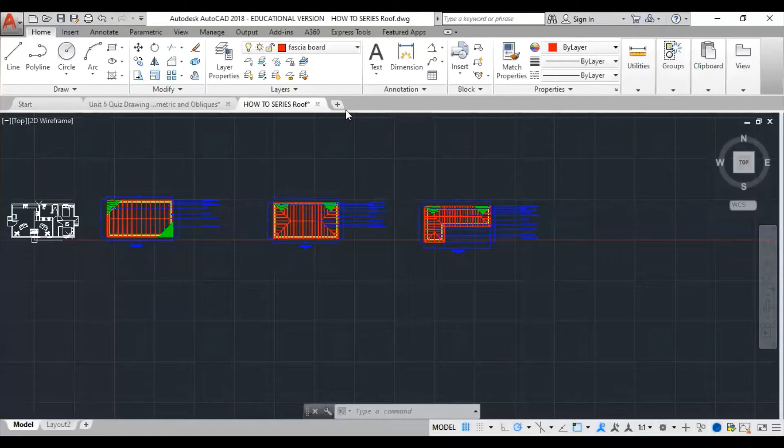Now, in terms of the dimensioning and labeling for the roofs, I will not be going through those in detail because once you do it once, it's basically doing the same thing for all the other four corners. I'm going to only show you how to label one part of the drawing, and you're allowed to do the rest by yourselves. Okay?

So I'm assuming that those of you in 4C have been able to complete a gable roof. I would like a verbal response, please. Were you able to finish the gable roof? Yes, miss. All right then.

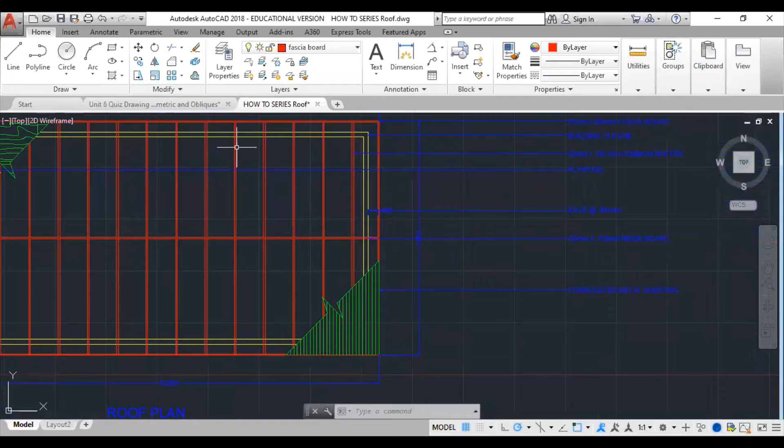Now, what I'll be showing you today is how to create a hip and valley roof. Just as the gable roof, you would need the outline, the building outline of the floor plan which you've drawn before attempting the roof plan.

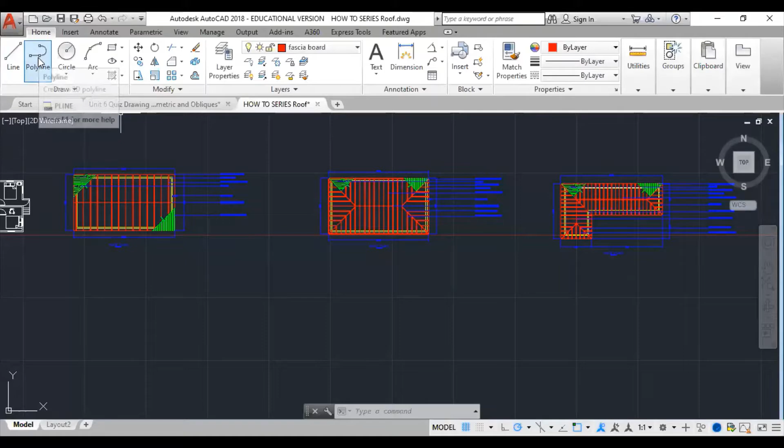So in this case, even though I've already created a hip roof here, what I'm going to do is take the outline of the existing building and create another drawing below it. In order to do so, you can use either a regular line or polyline, but polylines are easier to use to capture the entire outline of the building. So using the default layer, I'm going to select polyline and select the four edges of our building.

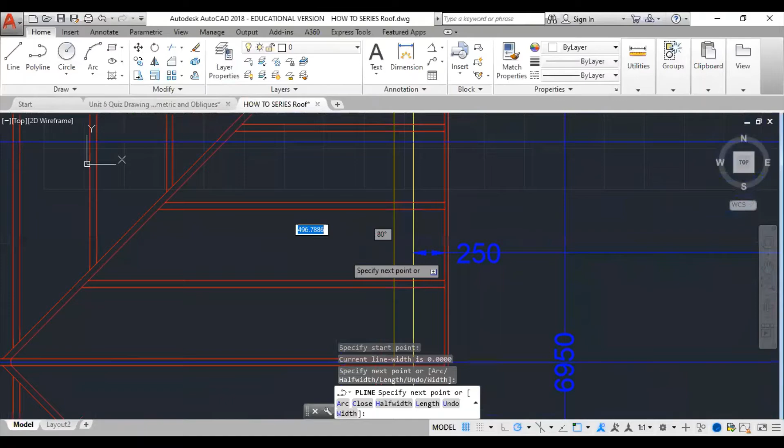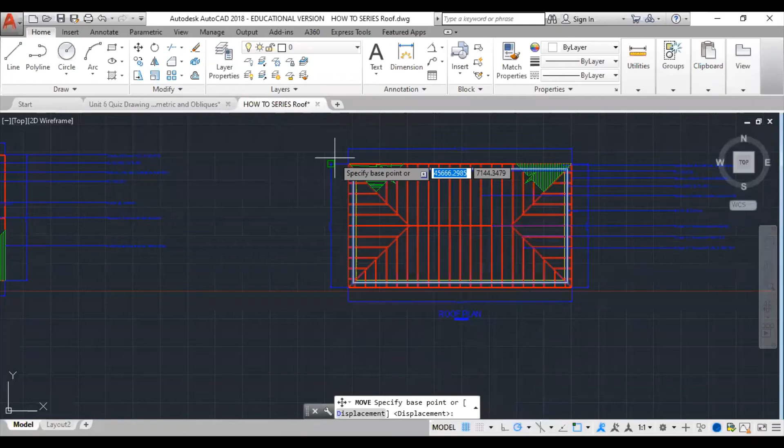All right, now once that is done, I'm going to select the line and then move it towards the bottom of my screen. So this here is my building outline.

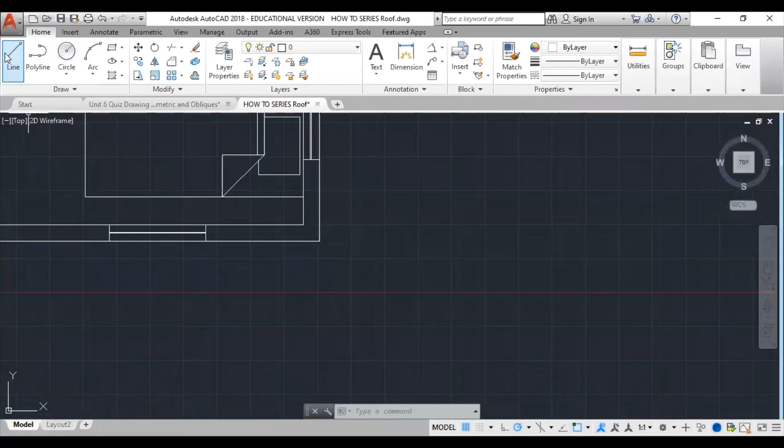Now, the thickness of the wall is determined by the thickness of the wall within your floor plan. If your wall thickness is 150, you offset inwards 150 millimeters; if it's 100 millimeters, you offset inwards 100 millimeters. It all depends on the thickness of your floor plan wall, the external walls of your floor plan. In my case, my walls are 150 millimeters thick, so within the outline that I have here, I'm going to offset 150 inwards. All right.

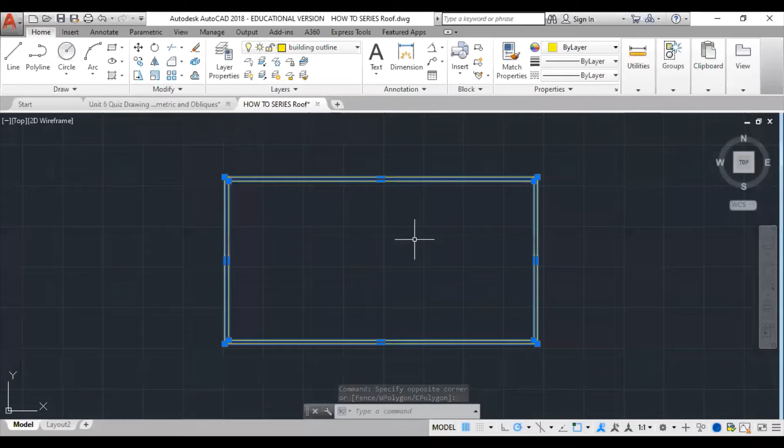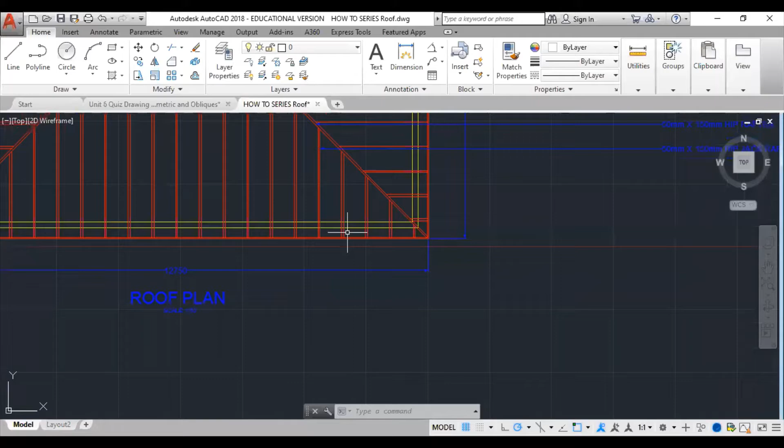Within my layers, we already have the pre-existing layers from the other roof plan that I've done. So what I'm going to do is change my building outline into the color yellow, but it should be yellow hidden lines, all right? Apparently I don't have that, so I'm not going to go through that today. All you need to know is that the building outline for your roof plan should be yellow. Take note of that, please. In terms of what type of line should be there, I'm not going to go through that as yet, but we may be able to tackle it some other time.

From there, we're going to create our eave in order to place our fascia board on our roof. Our eave is supposed to measure from the edge of the building 250 millimeters. So from the edge of the building, we measure 250 before we meet the inner edge of our fascia board. For those of you who may not know, the eave is the distance between the building and the fascia board within your roof.

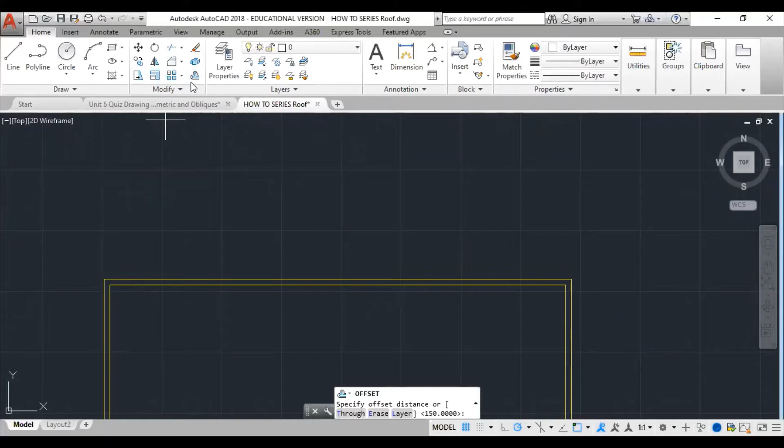So I'm going to offset 250 outwards, not inwards. In this case you may start to be a bit confused about which line is which, and this is where you should at least have these layers pre-existing before you attempt your drawing. So this third line, which I offset at 250 millimeters, will represent the inner edge of my fascia board.

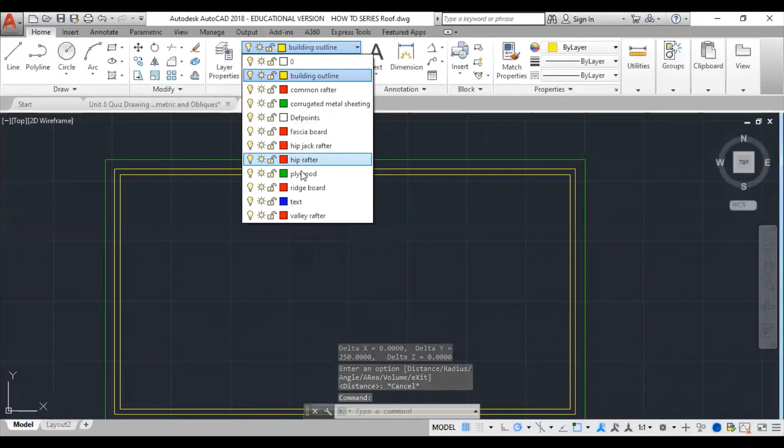So I'm going to select the line, then select the fascia board layer, and automatically it turns red. From there, I'm going to offset 25 millimeters to represent the thickness of my fascia board. And there's no need for me to change a layer because the previous layer before that was already red.

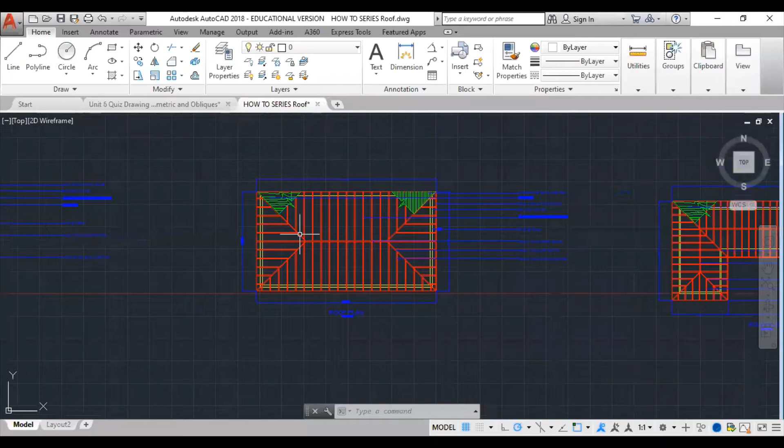So we have our building outline in place, we have our fascia board in place. Now, for those of you who may not know, a hip roof is different from a gable roof because it has four slopes within its edge. A gable roof only has two slopes.

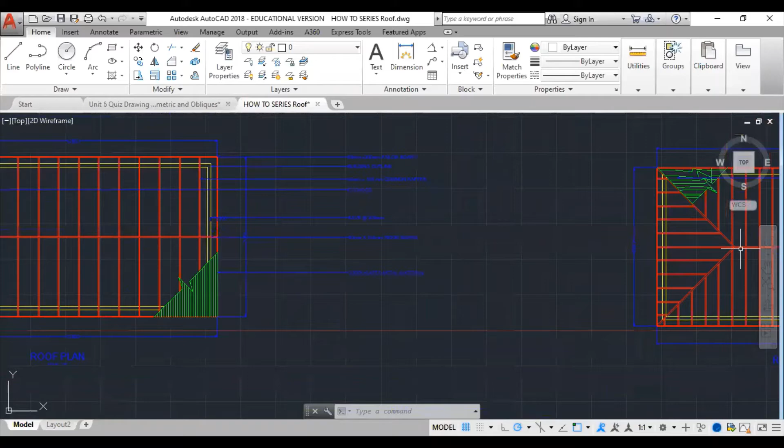So with the hip roof, we need to have rafters which will join at a common point. These rafters are called hip rafters, and then they're connected by a ridge board within the center. The same ridge board that creates stability within a gable roof is the same ridge board that creates stability within a hip roof as well.

All right, so with our drawing being here, I'm going to use the default layer, which is white. I'm going to draw a line at a 45-degree angle to meet within the center of my drawing. Now, to ensure that your line stays at 45, you go at the bottom right-hand corner of your screen.

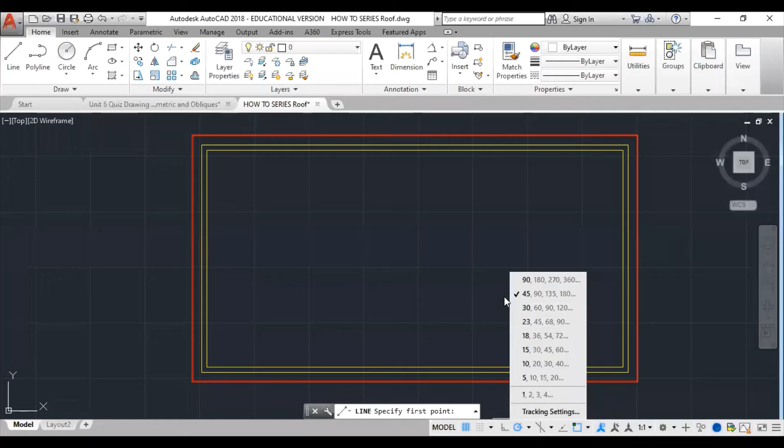You're going to see a circle with an angle within it that looks like a pizza slice. This here is the restrict cursor. You ensure that you change the angle to at least 45, 90, 135. Previously I had it as 30, 60, 90 because I wanted my lines to be at that angle. In this case, you want yours to be at 45, 90, 135. So you select or ensure that there's a tick next to that option.

Another thing is ensure that the grid is always on. And for the snap cursor, ensure that icon is on as well. Ensure that you have at least these parts ticked off. Well, these don't really matter, but in terms of the endpoint and midpoints, ensure that these two are ticked off at least.

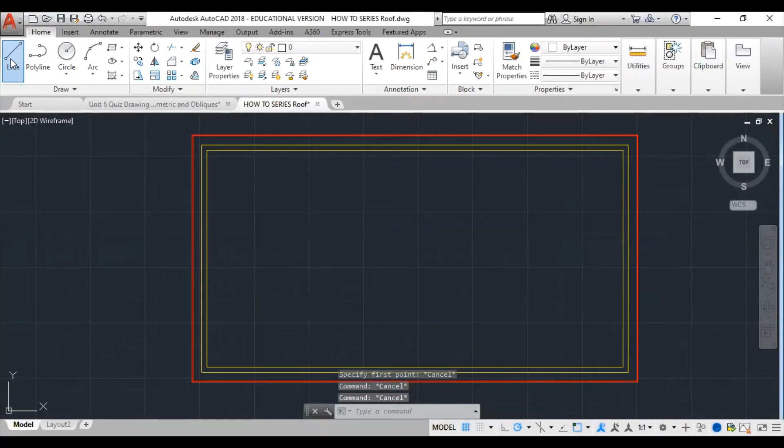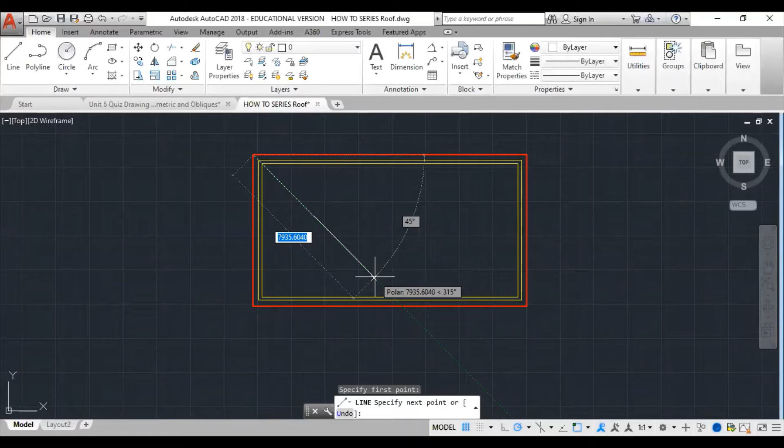So once you've checked that, you're going to start from the inner edge of your fascia board and draw a line inwards at a 45-degree angle. If you can see on my screen, it snaps at 45, or shows you at what angle the lines are at. And automatically you're going to know when it's at 45 when it snaps, and you see a green extension projecting outwards from the line you just drew. You do the same thing on the other side.

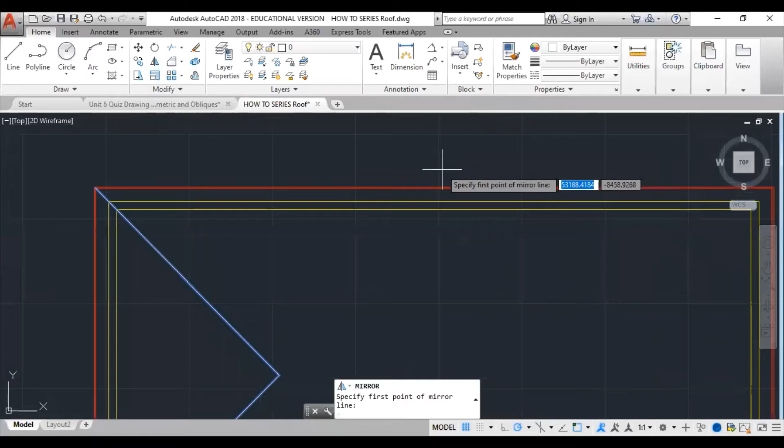And then you trim the excess line within the center. Now you can do the same thing up on the other side, or like what I'm about to do, I'm going to select these two lines and mirror it so that it's represented on the other side. Now to ensure that's centered, make sure that there's an even line or a straight line that shows the exact center point within the image, and you just mirror it.

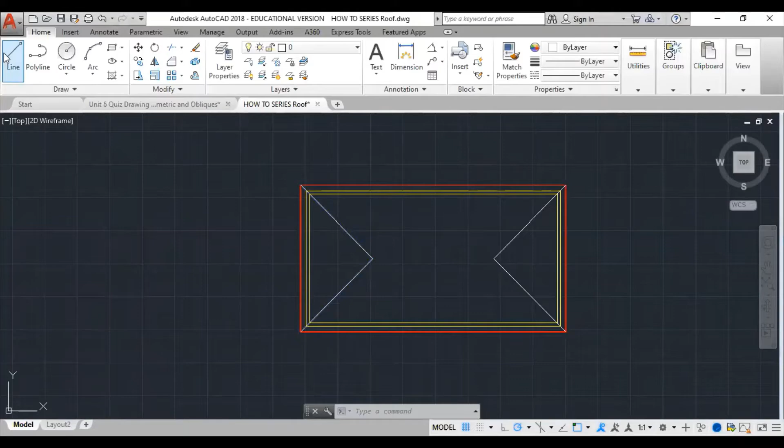It's going to ask you to erase the source object. You're going to say no because you want the source object. And there we go with the outline for our hip roof. Once that is done, you're going to draw a line within the center, connecting both hip rafters, and that there is your ridge board.

Is there anyone who does not understand so far? All right then. So...

The thickness of your rafters, whether it be common hip rafters or ridge boards, they vary in thickness depending on the size of your structure and the specifications. All you need to know right now is that the most common thickness of a rafter is 50 millimeters or 2 inches. That's the most common and the most used size of rafter in terms of its thickness.

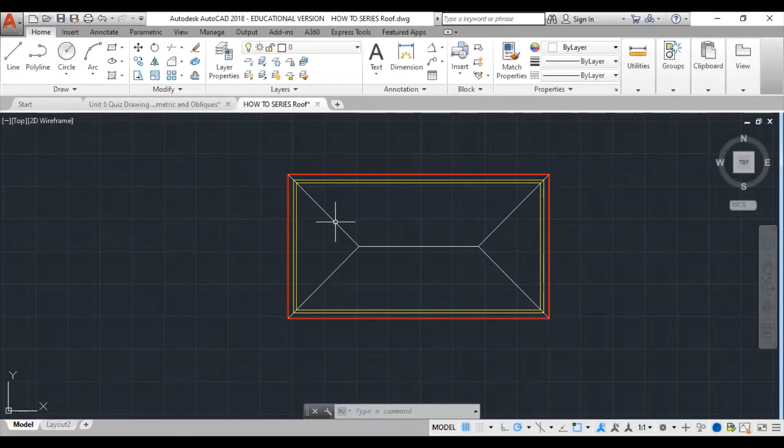So from the plan view, all of your rafters, whether it be ridge, hip jack rafter, hip rafter, or common rafter, they all measure 50 millimeters, as you can see here.

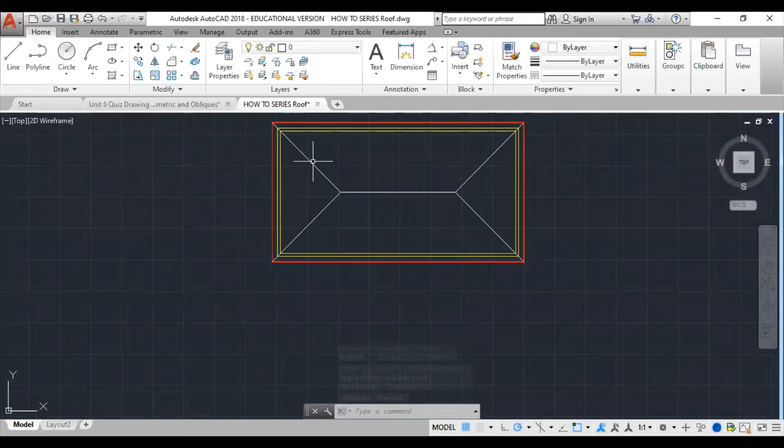So seeing that these white lines here represent where the rafters are going to be placed, this here is not the thickness of the rafter. You must include the thickness. So seeing that these lines represent the center points, it means that we have to find the thickness by offsetting the distance on both sides.

So if that rafter is 50 millimeters thick, it means that you need to offset from the center line 25 millimeters on both sides. 25 plus 25 equals 50. So I'm going to offset 25, do the same thing on the other side, and move to the other option.

Now, if you want, what you can do is just do the hip rafters on the thickness on this side. And once you've trimmed everything, you can just mirror it instead of having to do it 4 times.

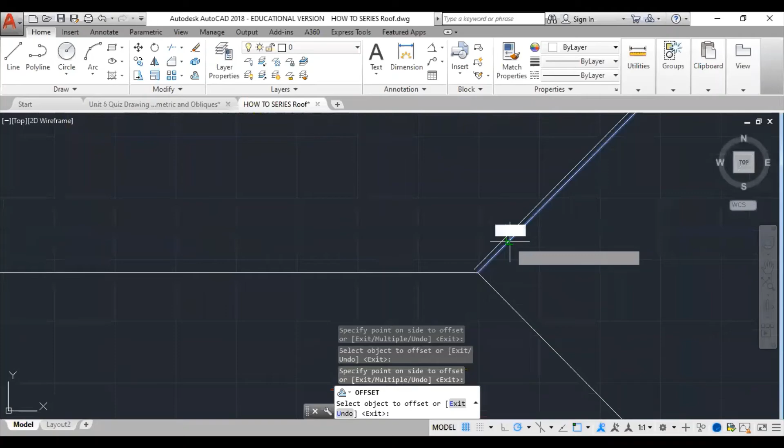Now, as you can see, I'm not doing the ridge as yet. As a matter of fact, I'm going to do the ridge one time as well. Again, the thickness is 25 on both sides, so you'll come up with a 50mm thickness.

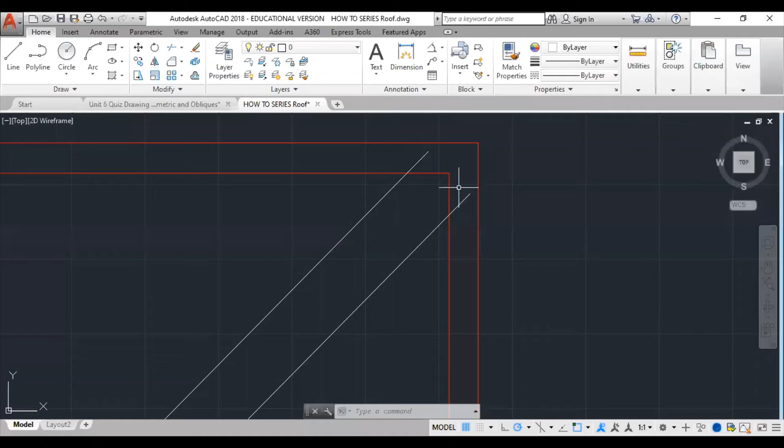Now, once that is done, you're going to remove the center lines and keep the thickness of the outer lines. Now you'll have to trim all the excess lines that you see that cross over into the fascia board. So I'm going to trim these sections here, come down, trim these sections here, go across, trim, go upwards, and trim.

Now we have to focus on this particular area right here where the hip rafters meet the ridge board. Now, for those of you who have done your connections within the textbook, the sketches, you may understand how this here works. For those of you who have not, I urge that you look at your textbooks and actually look at the detailed drawings of these areas here.

Now, what needs to be done is that you need to create the ridge board to extend or protrude at a point where both hip rafters can connect to it. So this section here, even though it runs in line with the ridge board, this here is not a ridge board. The ridge board stops right here. Whereas this section here, this is a common rafter.

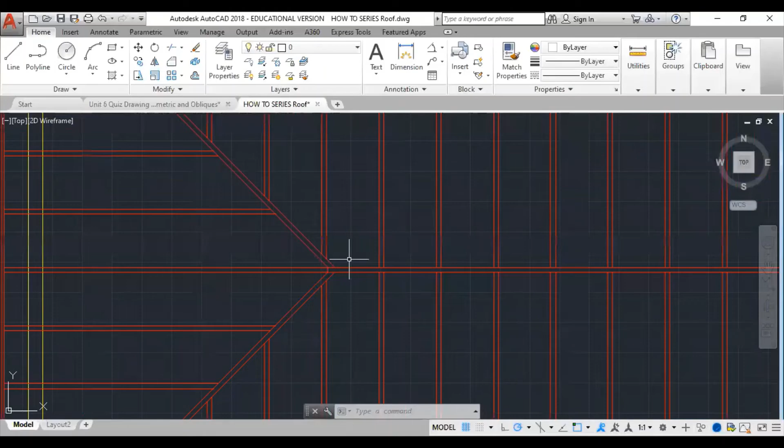And where that line is, this here is the ridge board itself. So in order to represent this within our drawing, what you need to do is extend these two lines, or these two parts of the ridge board, to touch the edge of the hip rafter.

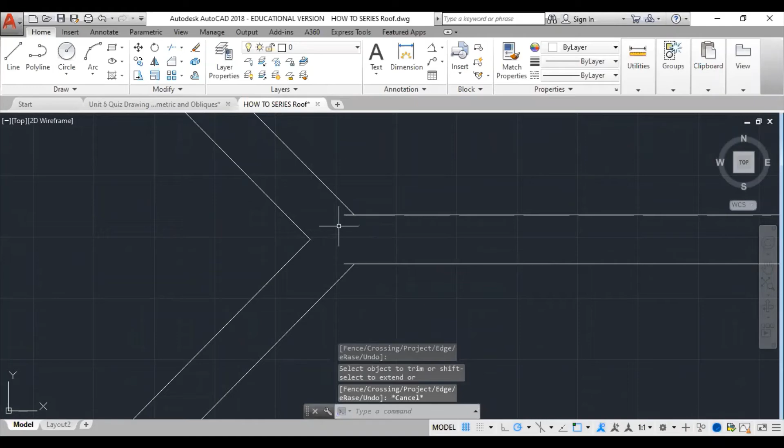Now there are a lot of lines here, so I'm going to break it down slowly. I'm going to first trim the excess lines here and these two parts right there, so the only lines I'm going to leave are these two sections.

Once that's done, you can lengthen each line manually, like so, or you can select extend. Select the boundary where you want the lines to stop at, right click on your mouse, and then allow the line to extend towards the edge of the hip rafter.

Once that's done, you're going to then trim the excess and draw a line to connect or to show the edge of the ridge board. And I'm going to do the same thing over here again.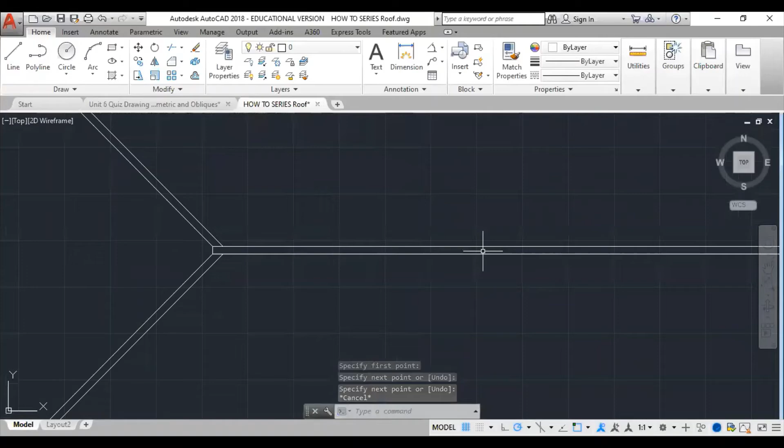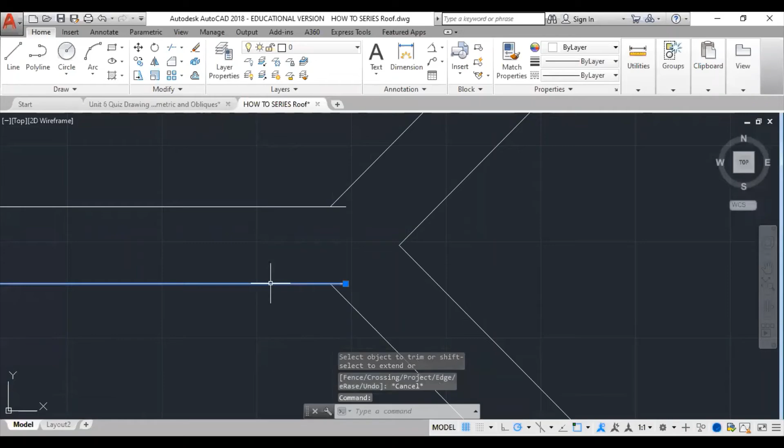First step, remove all the excess lines except for these two here. So I'm going to trim, right click, remove these sections here, then extend or lengthen. I'm going to just select the line, pull the blue knob to reach the end here.

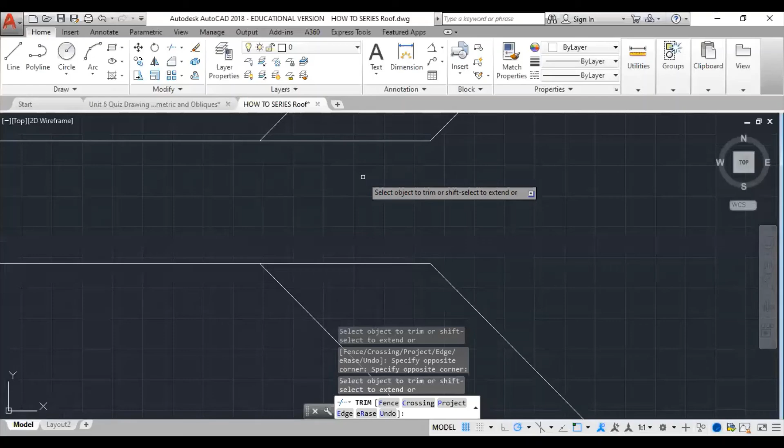Make sure it's horizontal. Or I could select extend, right click, and allow the line to extend towards that point. Trim. And then draw a line from here to here.

So this section here is our ridge board. This section here are our hip rafters.

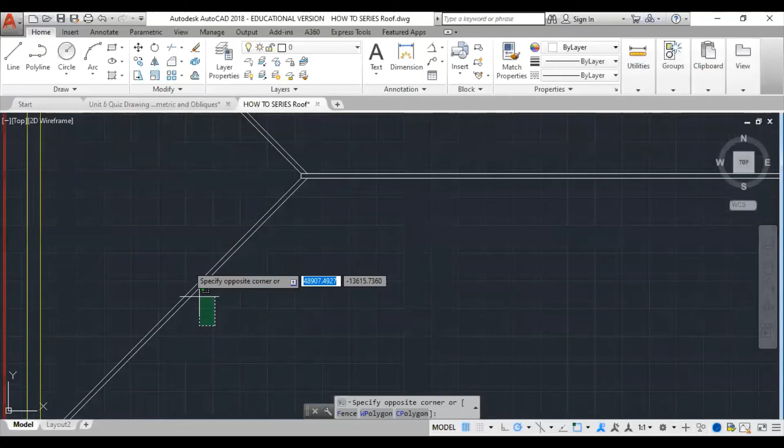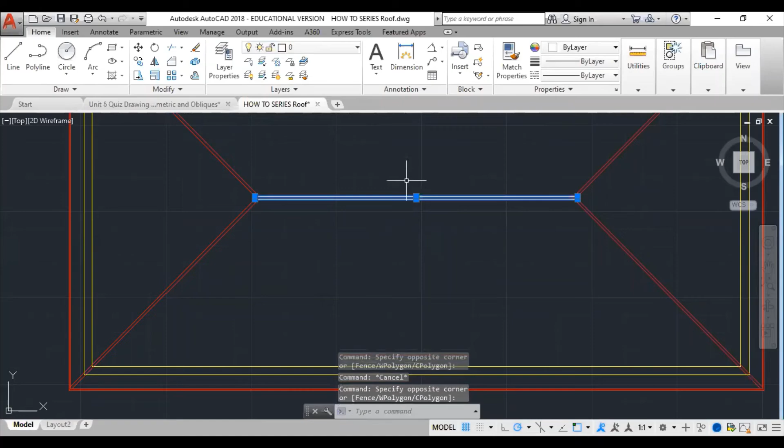So we're going to change the layer to hip rafter. All right. And this section here is our ridge board, so we're going to change the layer to ridge board.

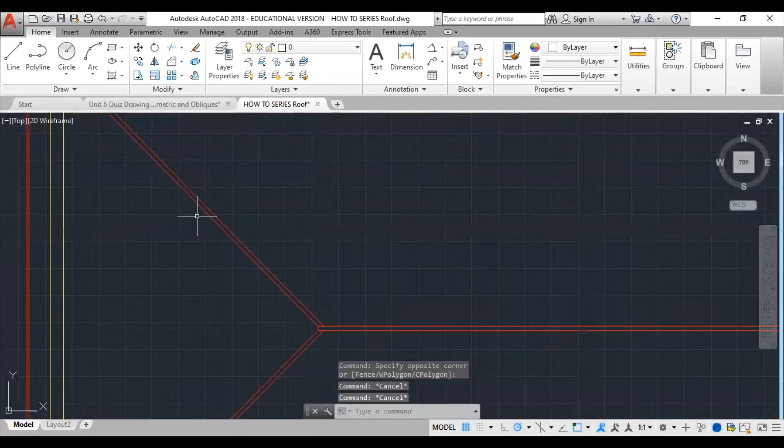So if you were to select any line that represents the components within the roof, if you select this section here, automatically it's going to show you it's a hip rafter. If you select this here, it's going to show you it's a ridge board.

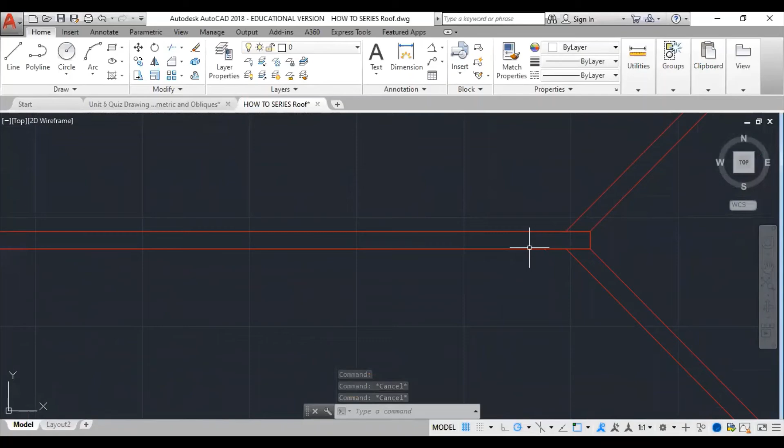So, what we've done was building outline, fascia board, hip rafter, ridge board. Now what we need to do is create the common rafters and hip jack rafters to fill in the space within.

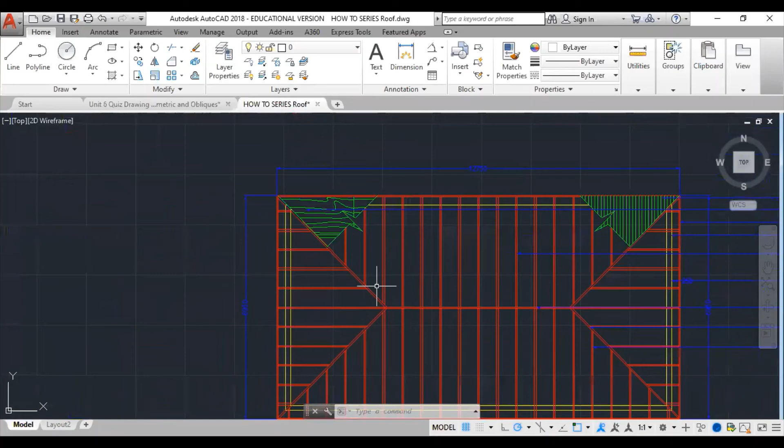So for those of you who don't know, the common rafters are the rafters that touch the ridge board. The hip jack rafters are the rafters that touch the hip rafter. So again, common rafters touch ridge board, hip jack rafters are those that touch the hip rafter. Take note of that, please.

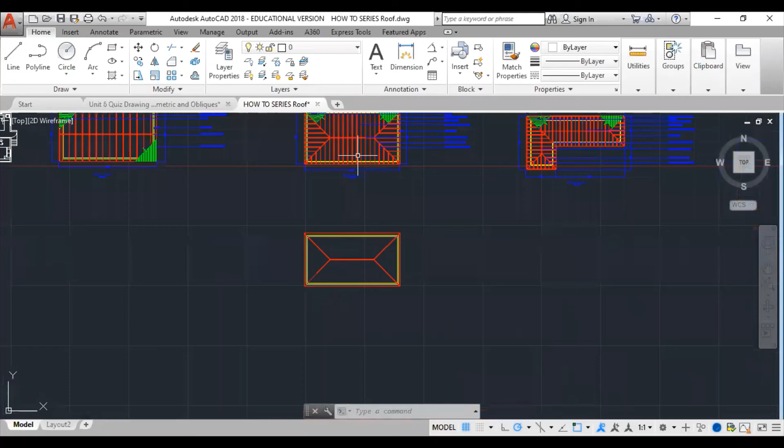Now, when drawing rafters, it doesn't matter where you start, it just matters on the distance that you keep between the rafters. Now, usually rafters are placed on centers, meaning from one center of one rafter, so if I was to draw a line from this section here, from this section here, say here, and repeat the same thing over here.

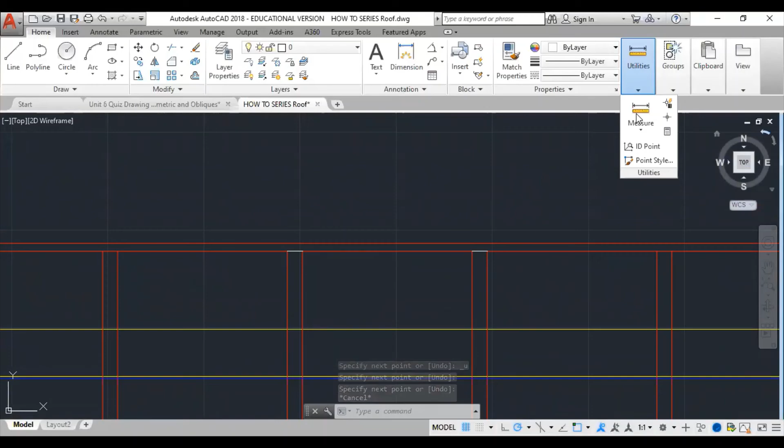All right. If I was to measure this, the rafters at its centers, from this point to this point, the measurement is 600. So it means that the rafters are placed 600 millimeters, or 2 feet, on centers. Now, that is not the distance you're going to get between the rafters if you were to measure them according to thickness, like so. As you can see, it's 550 millimeters.

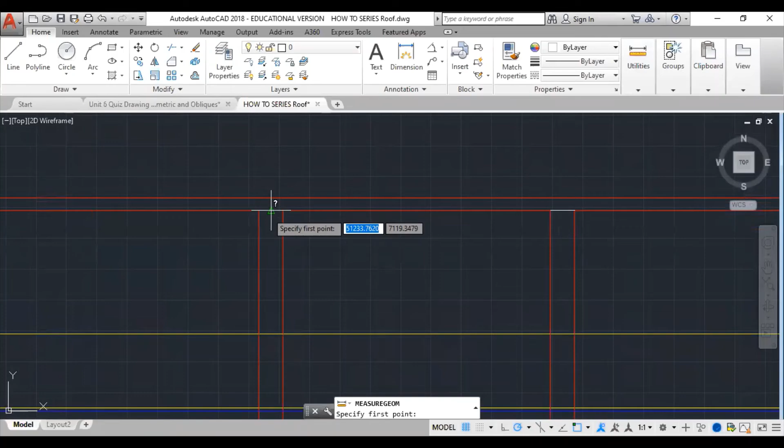So again, when you're measuring on centers, it means that from the center of one rafter to the center of the other rafter, the distance is 600. It's not the same as when you measure the distance of the rafters between their sides, it's going to be 50 millimeters less because of the thickness of the rafter.

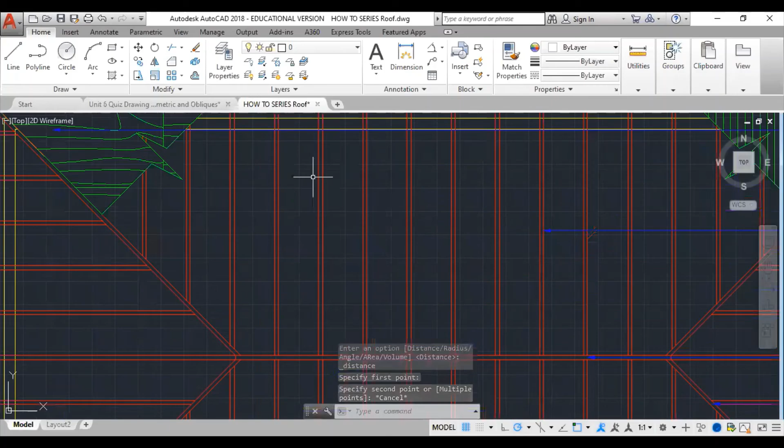So how would you represent rafters being placed on center within your drawing? What you need to do is start or draw a line at any point. So I'm going to start by drawing a line from this section here. All right, and then I'm going to offset the thickness. Well, not the thickness, sorry.

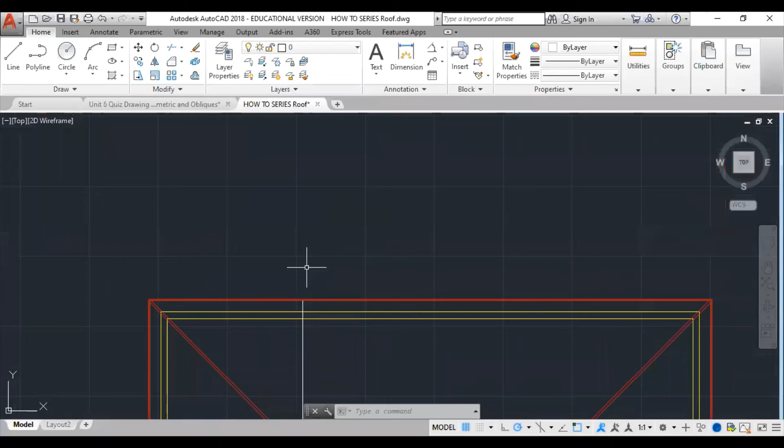I'm going to then offset the distance that I want the spacings between my rafters to be. So the spacings can vary from any distance, let's say 600 millimeters, 900 millimeters, it could be 450 millimeters in some cases. Because this here is 600, we're going to do the same below, so we're going to offset 600.

Offset a few times. Remember, you're going in one direction, okay? If you wish to go all the way down, you can do that, but I'm going to show you a shorter way of doing so.

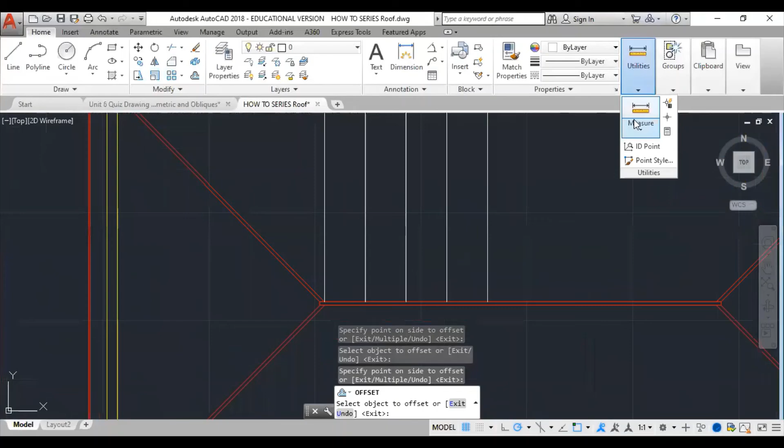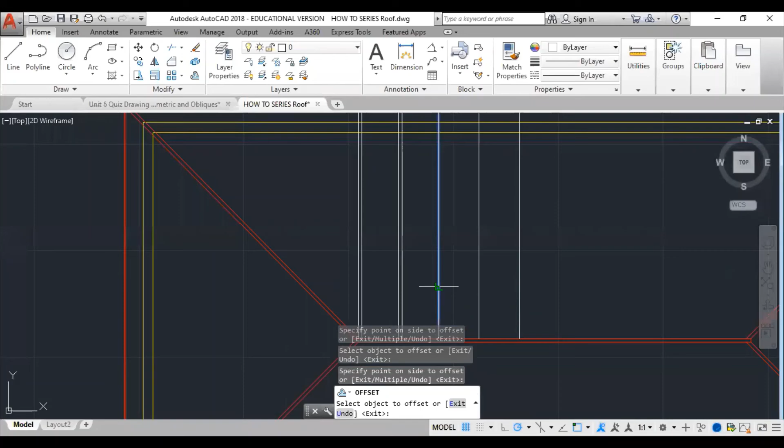As you can see, the distances between these lines are 600. Now I'm going to add thickness to the rafters. Remember, you can add thickness towards your right or towards your left, it doesn't matter which direction, just keep it consistent. So offset 50, enter. I'm going to go towards my right.

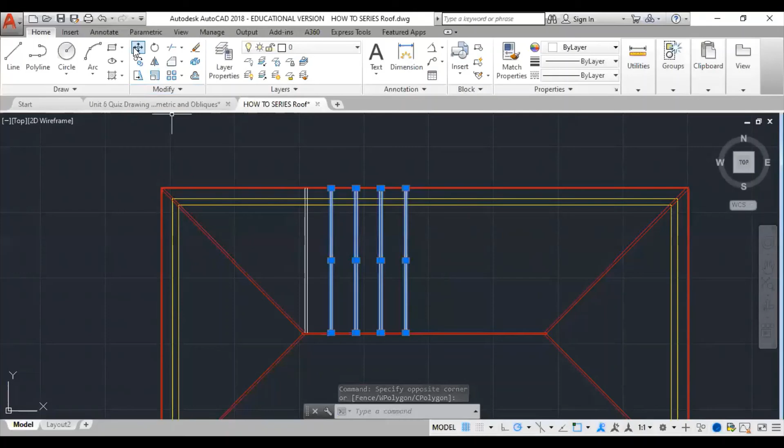Instead of replicating these lines throughout the entire section of the roof, I'm going to copy them. I'll select the last 4 that I've done, select the copy option, and start each copy at this point. Remember the point where I've started — I'm not choosing this inner line, I'm choosing the second line. Then I'll place it over here at a similar point and continue until it has filled up the space.

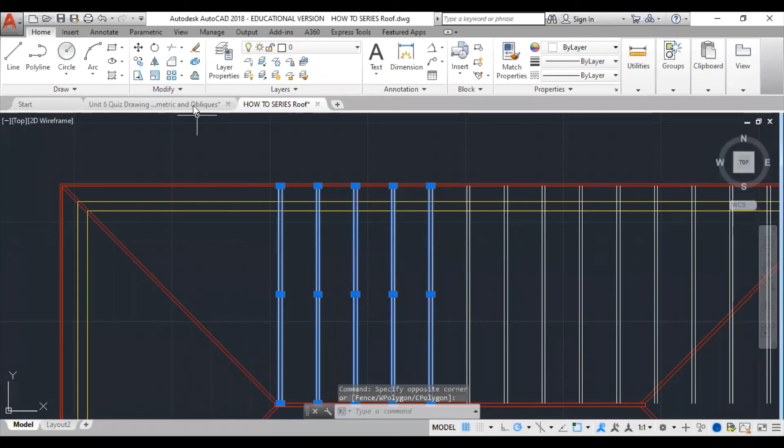We have 1 extra rafter that's out, we're going to remove that. Now I'm going to do the same thing in the opposite direction. I think I'll need at least 4, about 5 or 6 rafters. Same thing: copy selection, be mindful of the area you're holding in this section, and I'll replicate it in that direction. There, I have my rafters filled within one section of my roof.

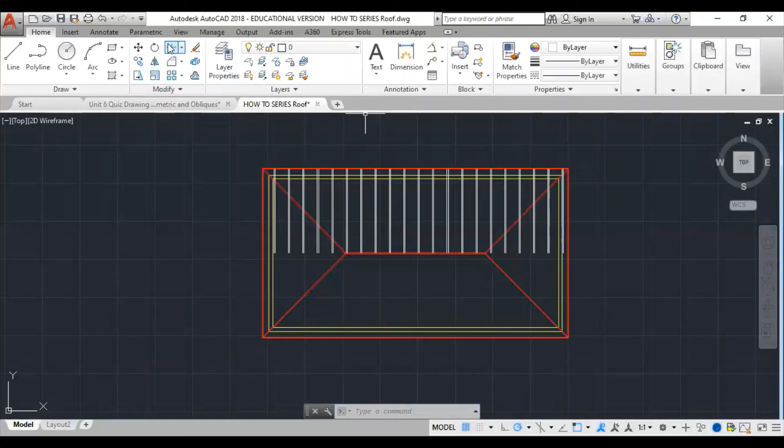Now I'm going to trim the excess lines. Look carefully at how I'm trimming. Select trim, select the boundary where you want the lines to stop at. So anything beyond where these blue highlighted lines are, I want removed. Right click on your mouse, then remove each line individually, or you can do it in groups.

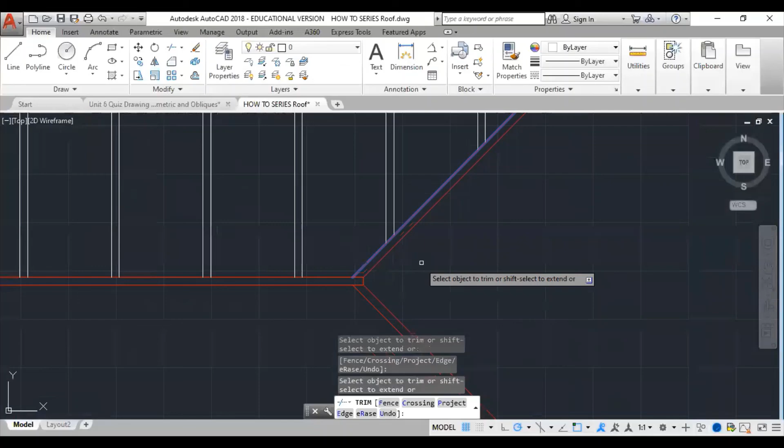Do the same thing. As you can see, all the lines are trimmed from this section. Move over to the other side and repeat the same thing. Remember, when you remove them in groups, ensure that the green highlighted space is the one you use, not the blue. The blue — well, we can't get the blue in this one, so it shouldn't be a problem.

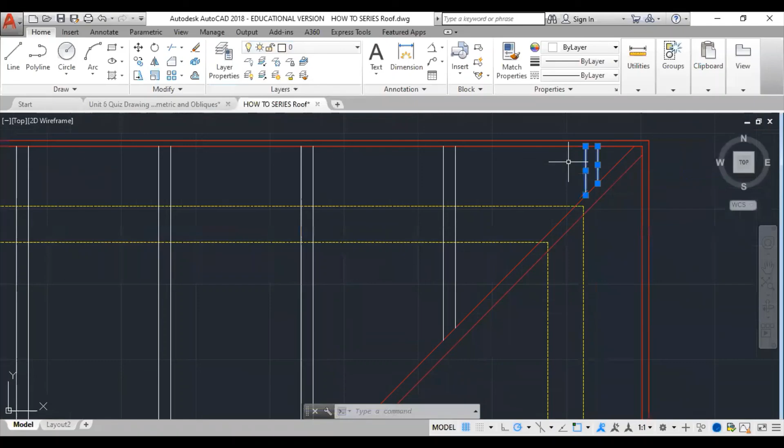And that's how we complete one section of our roof. Remember, common rafters are the ones that touch the ridge board, so I'm going to select all the common rafters here and change the layer to common rafter. Hip jack rafters are the ones that touch the hip rafter, so I'll select all the hip jack rafters over here and change them into a hip jack rafter layer.

Is there anyone who doesn't understand so far? Any questions? No questions? All right then.

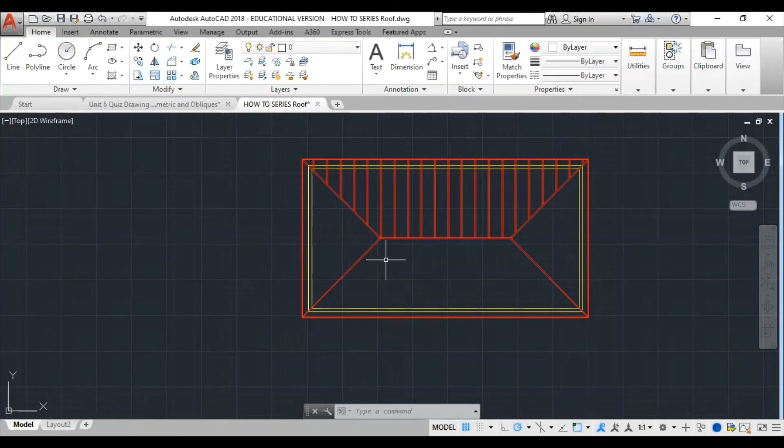Before the minute is up, I'm going to show you this last thing. Then if you feel comfortable doing this entire section over on this section here, feel free to do so. But in the event that you're in an exam, you may want to save as much time as you can.

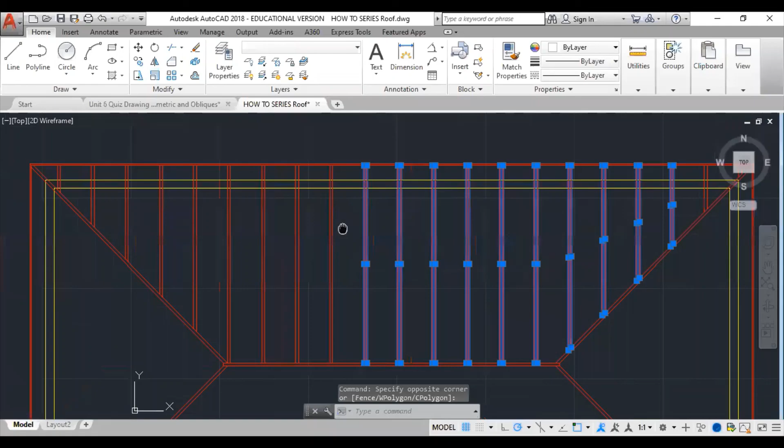So the best thing to do is select the rafters. Find a midpoint. In this case, it can be at the edge of the fascia board, or it could be just by the ridge board right here.

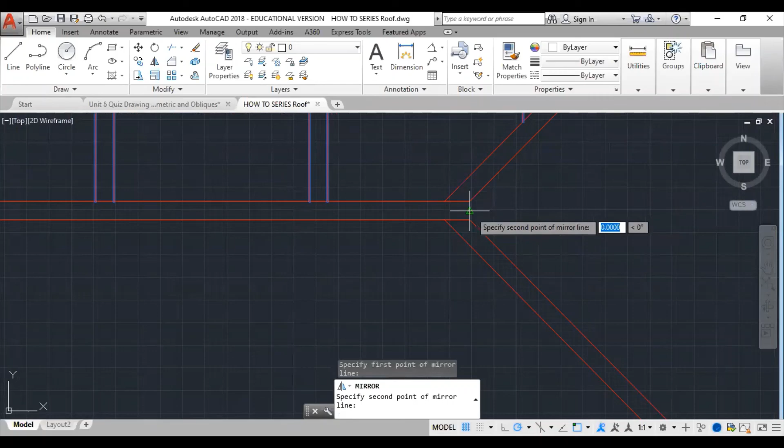You're going to select mirror and then rotate the rafters over on the other side. Make sure it's straight, select it. It's going to ask you if you want to erase the source object, and you're going to say no. That's how you create the same rafters on the other side.